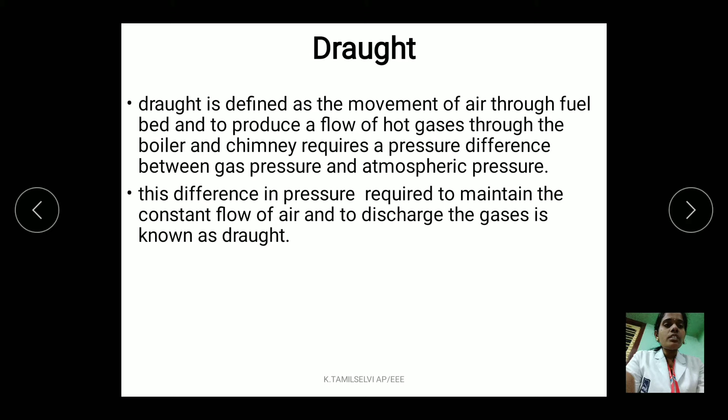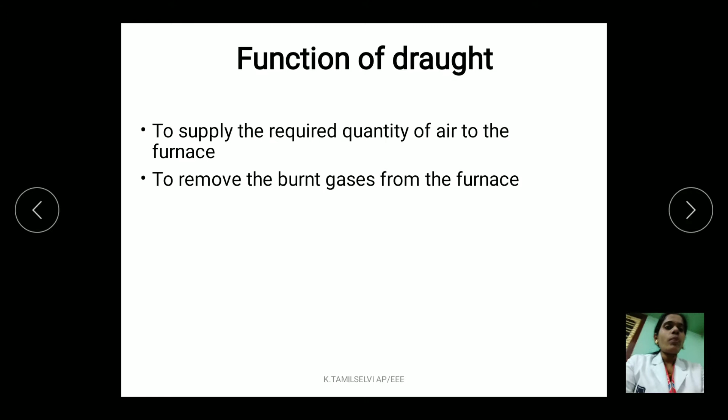draft system. So the main function of this draft system is to supply the required quantity of air to the furnace, and the second thing is to remove the burnt gases from the furnace. So these are the two very important functions of draft systems. So the main function of draft is to remove the burnt gases and to supply the required quantity of air to the furnace.

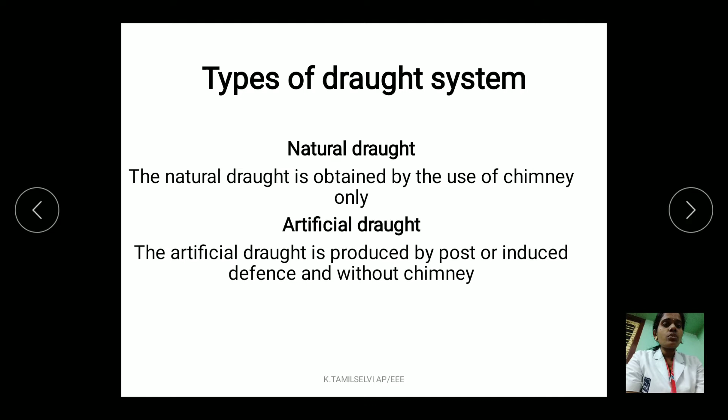Generally, it is handled in two ways. One is natural draft and the second one is artificial draft. Here, the natural draft is obtained by the use of a chimney. Artificial draft is produced by forced or induced fans and without chimney. Here, for natural draft, we estimate the height and diameter of the chimney. The natural draft is equal to the difference of pressure due to the cold air column and hot gases.

So, the natural draft is produced by a chimney or stack. Here, a natural draft is created by the difference between the atmospheric air and hot gases in the furnace. The main advantage of natural draft is no external power is needed and a long life of chimney is obtained. The maintenance cost is nil. It needs less capital investment. And the disadvantage of natural draft is that less pressure difference is created and the draft decreases when the outside air temperature increases.

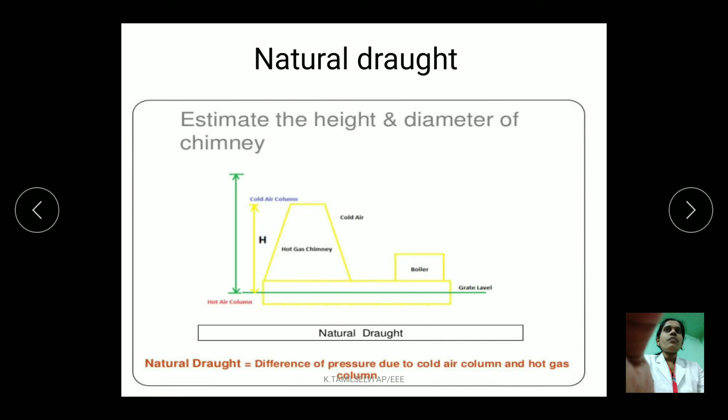And generally mechanical draft is produced by fans, that is forced draft fan and induced draft fan. These are employed in large sizes of boilers to create the necessary draft in order to reduce the height of chimney. So now let us see about forced draft. In this system, a blower is installed near the base of the boiler furnace and the air is forced to pass through the furnace.

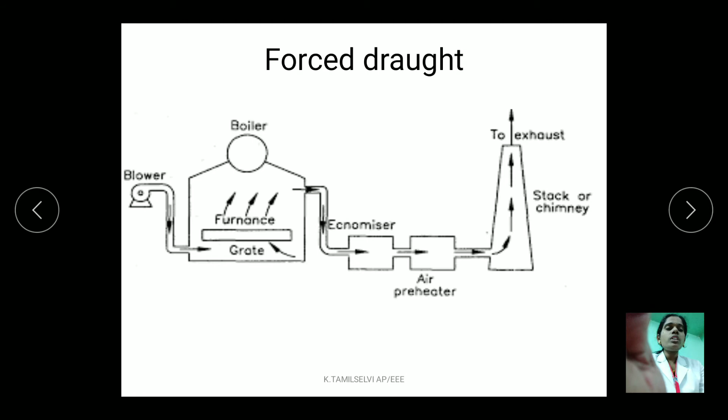Here, the pressure throughout the system is above the atmospheric pressure and the air is forced to flow through the system. Generally, the power input is the product of fuel burning rate, specific volume of inlet air, air-fuel ratio, and the pressure head developed by the fan, and the efficiency of the forced draft fan.

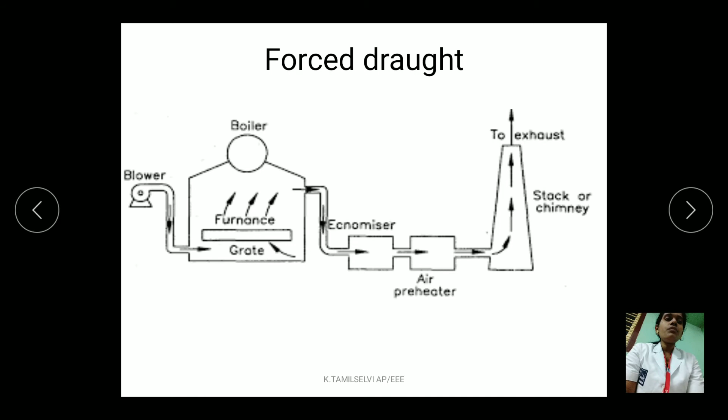Induced draft fan. In this induced draft fan, the fan is located near the base of the chimney instead of near the grate. Here, the suction pressure in the system is below the atmospheric level. The chimney is also used in the system, but the total draft is produced by the fan only. Here, the power input for induced draft is calculated by fuel burning rate, air-fuel ratio and specific volume of the flue gases.

So here the difference between forced and induced draft fan is, in the forced draft fan a blower is placed near the base of the boiler and the air is forced throughout the system. In induced draft, the fan is located near the base of the chimney instead of near the grate. So, the suction pressure in the system is below atmospheric. The chimney is also used in this type, but the total draft is produced by the fan.

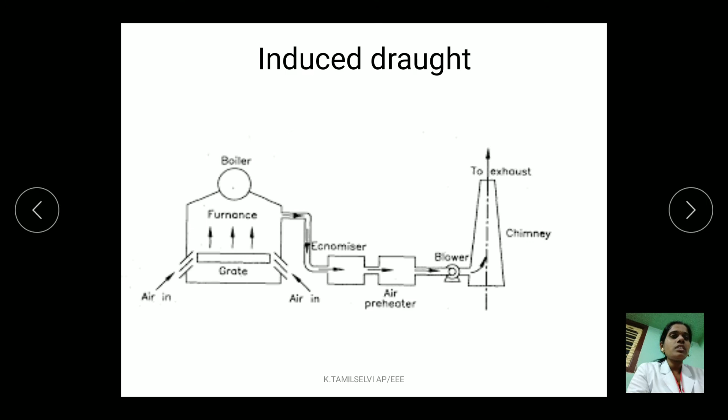And the general advantages of induced draft are that the draft pressure can be easily changed, the rate of combustion is high, and the fuel burning capacity is high. Balanced draft. So balanced draft is nothing but a combination of forced and induced draft, because both the fans are located near the base, that is the grate and the chimney. So the balanced draft uses both the forced draft fan and induced draft fan.

The main function of a draft system is to supply the required quantity of air to the boiler, and at the same time to remove the burnt gases from the boiler. These are the main functions of draft system.